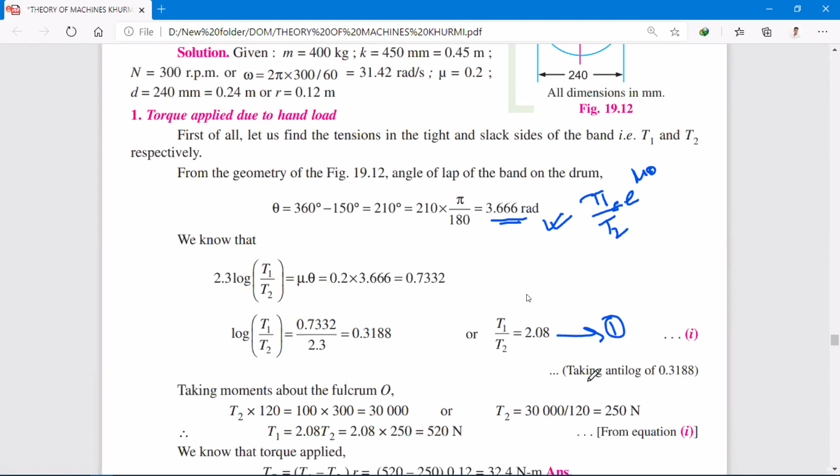But as my braking torque is not given to us, now I will use moment to find the braking torque. Now if you see here, you can see that my drum is moving in clockwise motion. In the figure they mentioned that my drum is moving in clockwise motion. As it is moving clockwise, so my T1 will be in this direction straight away, and my T2 will be in this direction. So my T1 is acting in this direction. This is my P, that is given to me, 100 Newton, and everything they have given to me.

Now what I will do is take the moment about this point O. Now when I'm taking the moment about this O, you can see here, this T2 into this distance, 120, T2 into 120, which will act in downward direction. Now if you take T1 into O, this is also acting in downward direction, but here at this portion, as I'm taking the moment over this point O, this T1 will get cancelled.

This T1 will get cancelled, and this point, okay, this 100 Newton.

Now if you see, I will make your lesson more easy. This T2 into 120 will try to rotate about this O in anti-clockwise motion. You understand that way? This T2 into 120 about this point O will try to rotate in anti-clockwise motion.

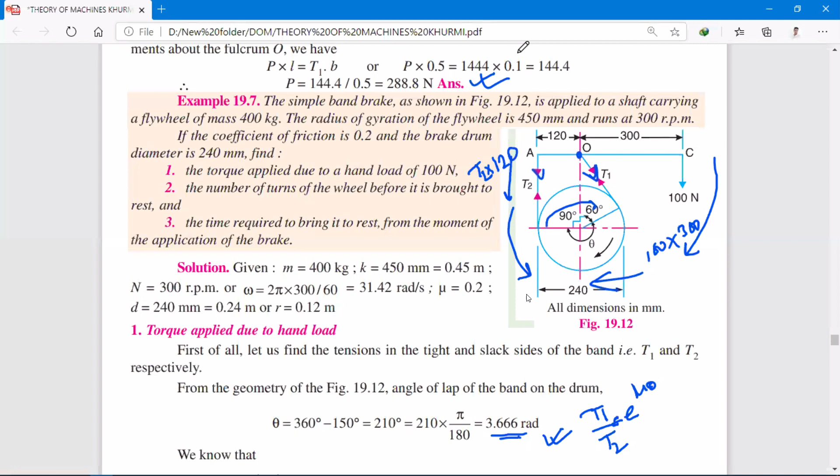So as they both are opposite to each other, this is my 100 into the length 300. So as they both are in opposite direction, straight away I will equate them. So what I will get here, T2 into 120 is equal to 100 into 300.

So the same thing they have wrote here, taking moment about the fulcrum, T2 into 120 is equal to 100 into 300, and then solving, I'm getting here T2 equal to 250 Newton.

Now, if you recall the first equation, T1 by T2 is equal to 2.08. Simply substitute T2 value here, and you will get one new T1 value. So this T1, after solving it, you are getting 520 Newton.

Now, we know the braking torque formula is T1 minus T2 into R. Braking torque formula was T1 minus T2 into R.

Simply substitute this T1 value that we are getting, 520 here, and T2 value 250 we are getting here. R is nothing but the diameter of the drum, the radius of the drum. Simply substitute all the values, and at last what you are getting here is 32.4 Newton meter. So this is my braking torque.

That is my braking torque. So this was my first part of the question.

Now they are asking, the second part is the number of turns of the wheel before it is brought to rest. So we have to find the number of turns. So we will assume that let small n equal to number of turns of the wheel before it is brought to rest.

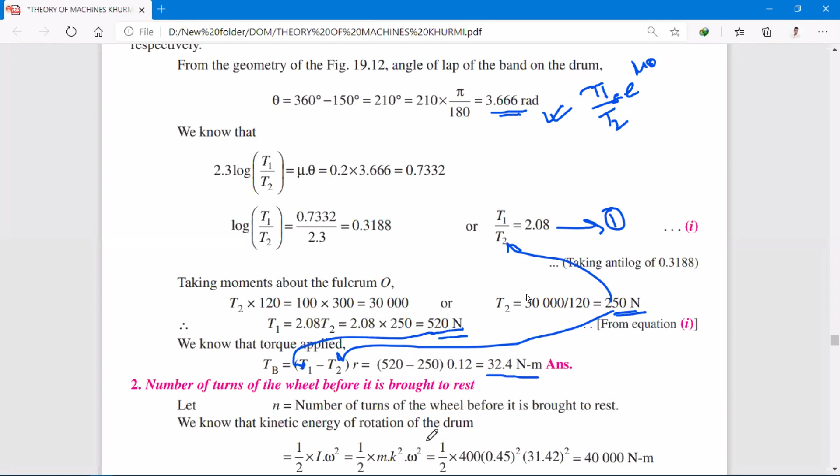Replace all the thing by the given data, and then at last I am getting here 40,000 Newton meter. So this is my kinetic energy of the rotation of the drum.

Now this kinetic energy, we have assumed that let the kinetic energy be used to overcome this work done by the braking torque in n revolution, because n is nothing but my number of turns of the wheel before it is brought to rest.

So straight away we can write, hence we can write from here that braking torque into angular displacement is nothing but equal to kinetic energy of the flywheel.

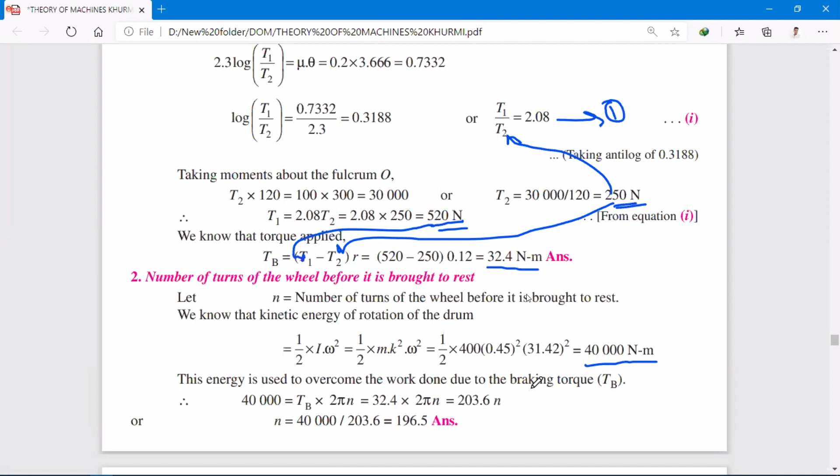So we can write braking torque into angular displacement equals kinetic energy. Now, what's my angular displacement? If you see, total is my 2 pi, drum is my 2 pi, but it will rotate, let's say, n times. So at last, what I'm getting here in angle is 2 pi into n.

And TB we know the value, TB is 32.4 Newton meter. So 32.4 into 2 pi into n is equal to kinetic energy. Kinetic energy we've got 40,000 Newton meter. Substituting all this, I'm getting at last n equal to 196.5.

So number of turns, n equal to 196.5. So always remember, what we are doing is we are using kinetic energy to overcome the work done by the braking torque in n revolutions.

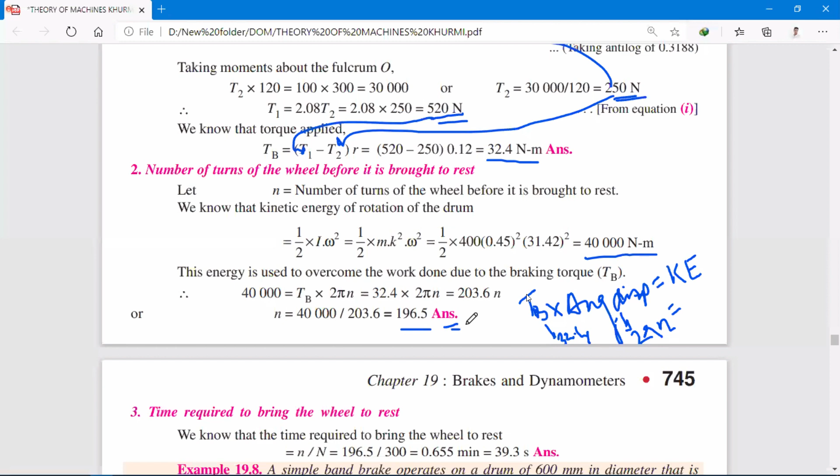Now it is again asking the time required to bring the wheel to rest. If you see here, this small n is nothing but the number of turns, and capital N is my speed. So simply I'm dividing these two.

I'm just dividing n by capital N, and at last we get 39.3 seconds, which is the required answer. So time required to bring the wheel to rest is n divided by capital N.

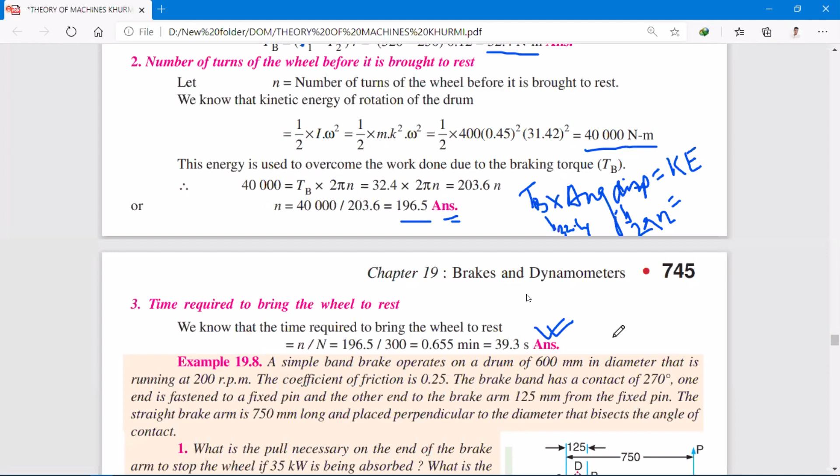So this was one of the important questions for simple band brake. Please try to solve all the numericals from Khurmi or Rattan, whichever you like, please try to solve it.

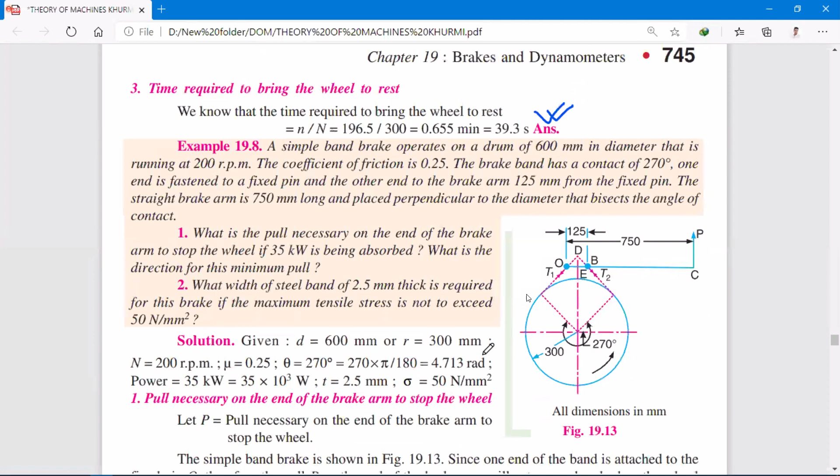Now coming to differential band brake. If you see in the simple band brake, out of the two ends, one end is connected to the fulcrum point of the lever. But here in differential band brake, they will be kept in separate, different positions. They won't be attached to the fulcrum or pivot point. That's why they are known as differential band brake.

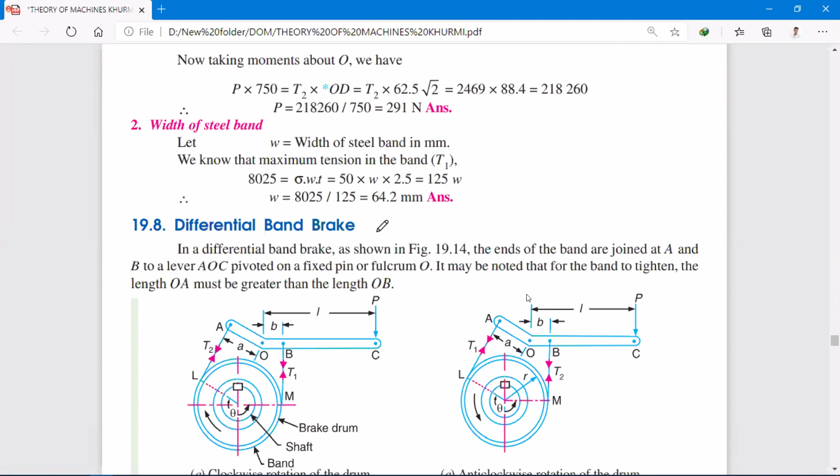So differential band brake looks somewhat like this type, but all the principles work just the same way as the simple band brake works. Just we will have one more thing if you see this diagram here.

Suppose I have to find the moment about this clockwise rotation of the drum, so T1 is that. So how will we get here? P into L, which is trying to rotate in clockwise motion. T1 into B, this is also in clockwise motion. T2 into A.

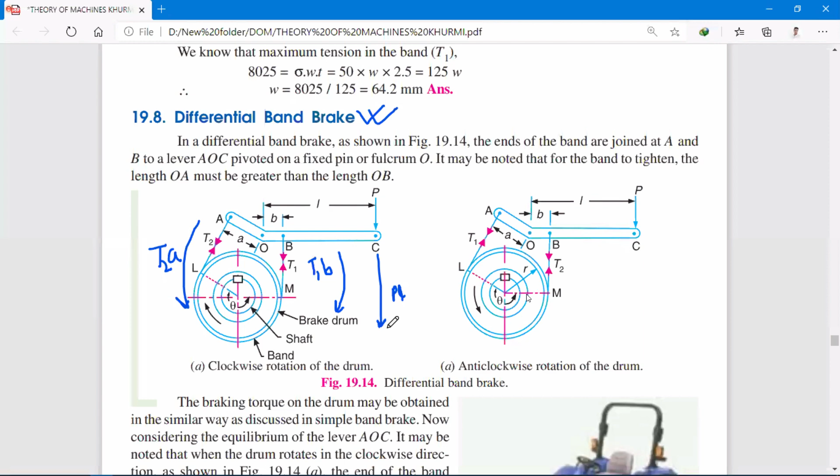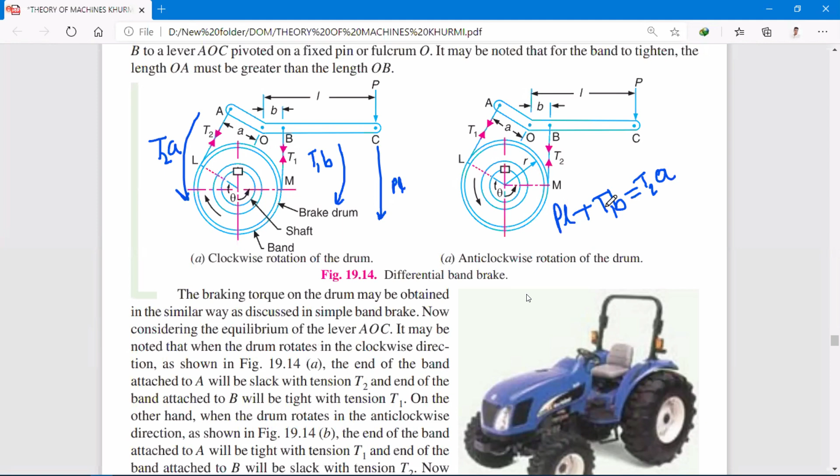This direction is anti-clockwise motion. So at last, what I'm getting here: PL clockwise, T1 into B clockwise is equal to, because it's moving anti-clockwise, T2 into A. So this way we have to find the moments. But in simple band brake, any one part is to get zero, because it is connected to the fulcrum point or pivot point from which we have to take the moment.

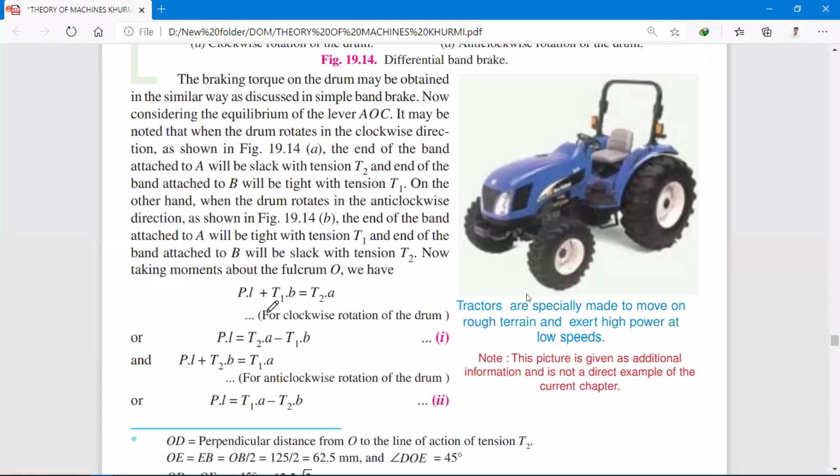But it will not happen here. You can see from here what I'm getting: PL plus T1B is equal to T2A. So that's the same thing I'm getting here: PL plus T1B is equal to T2A.

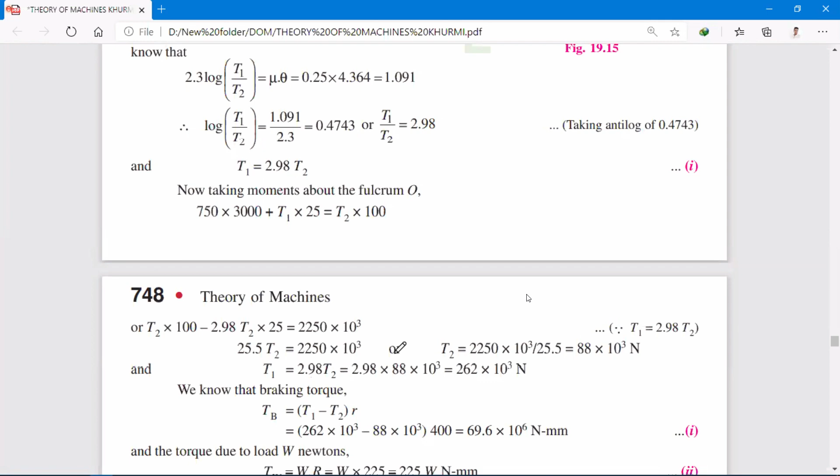Otherwise, it works the same way as we solved the numerical for simple band brake, the same way it will work here also. Just you should know how to find the moment. So this one is very much important, how you're finding it.

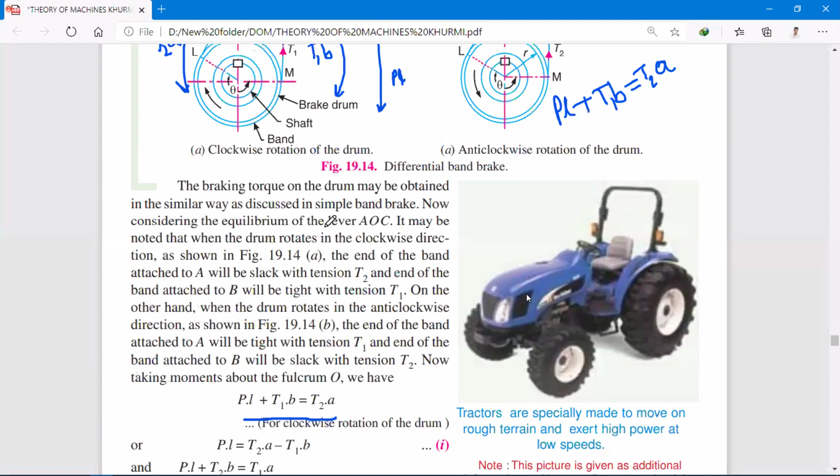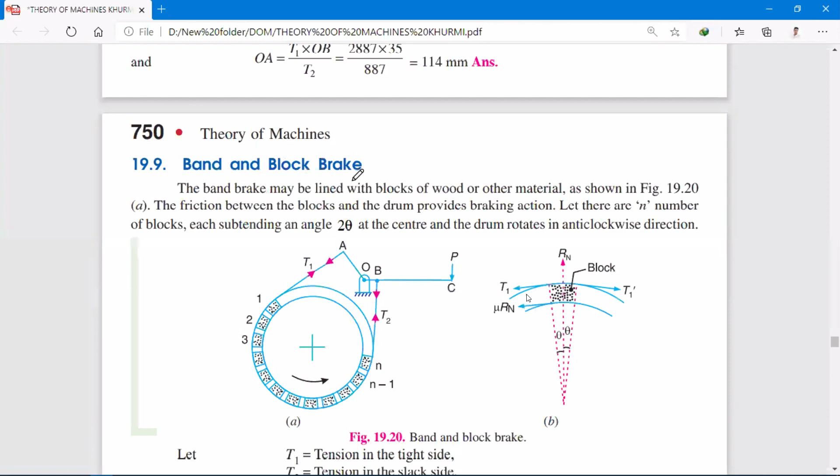Now coming to the last one, which is my band and block brake. It will follow the same process like simple band brake. Only difference is that with the band brake, we are attaching some block brakes in them.

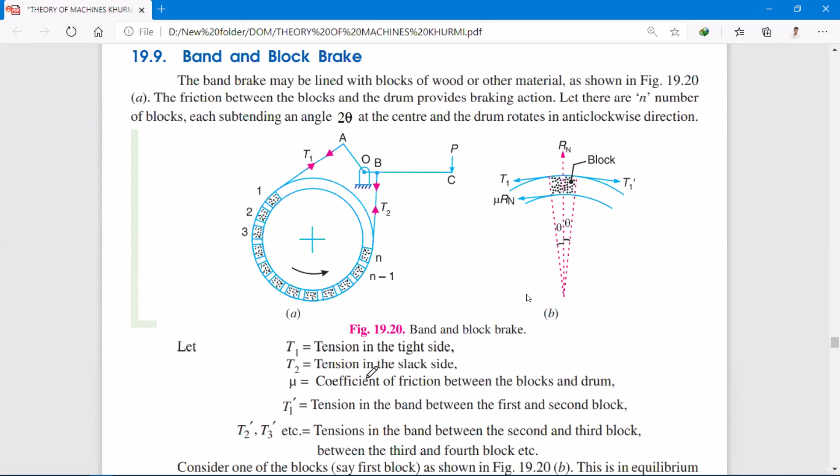T1 is the tension in the tight side, T2 is the tension in the slack side, mu is the coefficient of friction, and n is the number of blocks that we are adding to it.

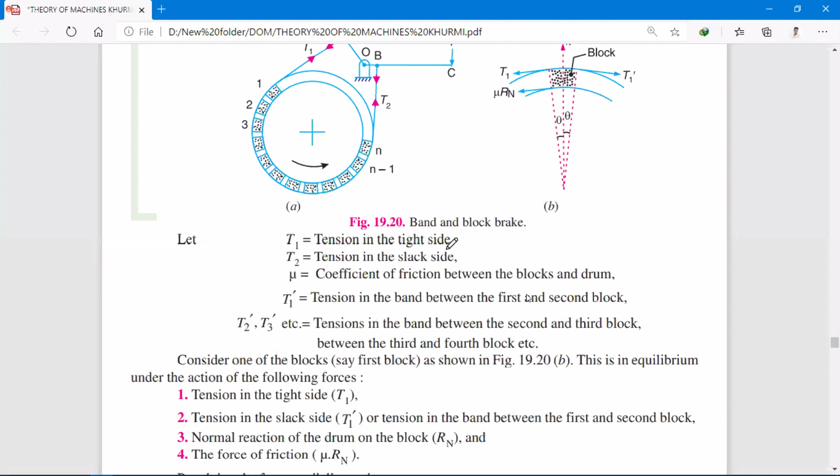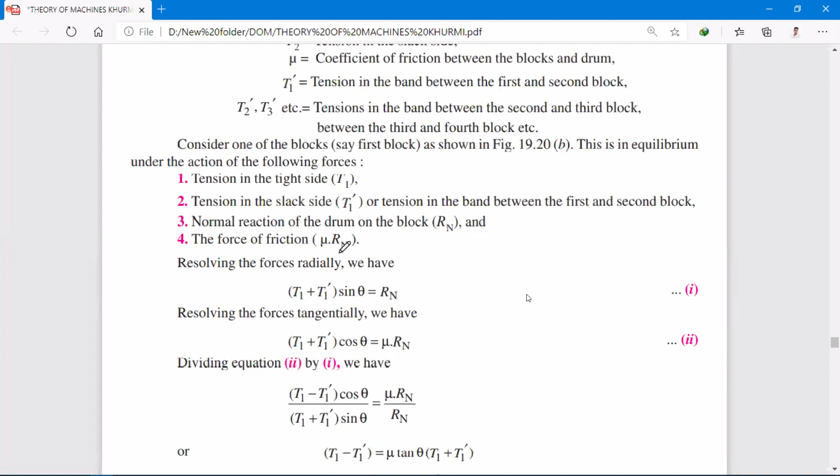Tension in the tight side is T1, and tension in the slack side is mentioned as T1 dash. Now normal reaction on the drum, on resolving. So at last, after solving all this, you will get one equation.

T1 by T2 is equal to 1 plus mu tan theta by 1 minus mu tan theta, to the power n. Or we can write Tn by T naught is also equal to this, so Tn by T naught equals T1 by T2 equals 1 plus mu tan theta by 1 minus mu tan theta to the whole power n. This is one of the important formulas you should remember for the band and block brake.

Again, it will have the same formula for braking torque: TB equals T1 minus T2 into Re, where Re is the effective radius. If the thickness of the belt is given, Re equals R plus T by 2. If the thickness of the belt is not given, then the simple formula T1 minus T2 into R is used.

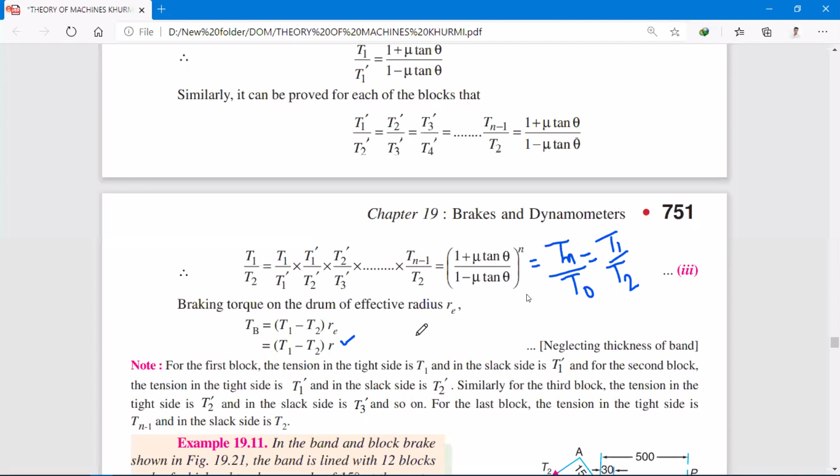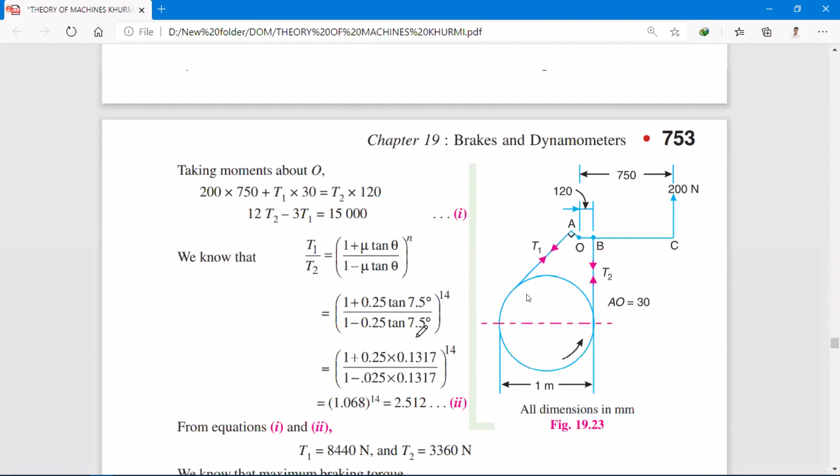So if we try to solve a numerical on that, let's see if time permits, we will solve a numerical. It's quite lengthy, so let's solve it.

As mentioned in a simple band brake, for the band and block brake, as shown in the figure, the band is lined with 12 blocks, so n equals 12. Each of which subtends an angle of 15 degrees at the center of the rotating drum.

This angle will be nothing but 2 theta, so 2 theta equals 15 degrees, meaning theta equals 7.5 degrees. The thickness of the block is 75 mm, so T equals 75 mm, and these T values are given to us.

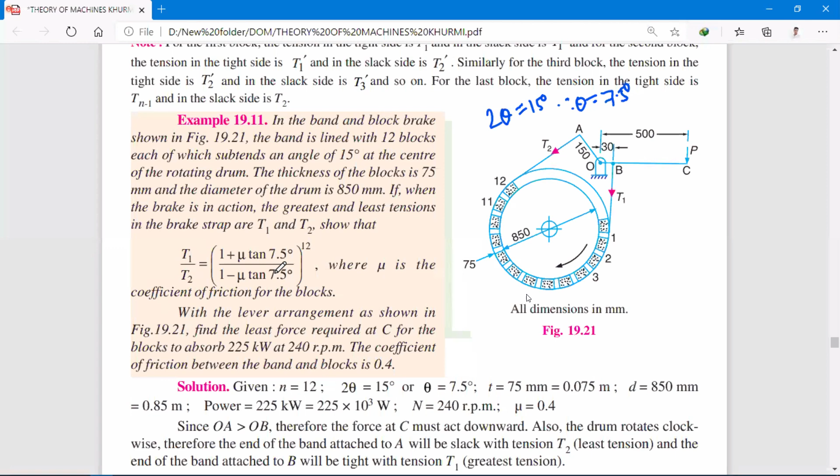The diameter of the drum is 850 mm, so D value is given to us. When the brake is in action, the greatest and least tensions in the brake straps are T1 and T2. Show that T1 by T2 equals 1 plus mu... let us prove this, it's a proving question.

Leave that, we will. This is the proof. Okay, we'll solve this numerical.

A band and block brake having 14 blocks, each of which subtends an angle of 15 degrees at the center, is applied to a drum of 1 meter effective diameter. So the D value is given to me.

The drum and flywheel mounted on the same shaft has a mass of 2000 kg. So flywheel mass they have given to me, 2000 kg, and a combined radius of gyration of 500 mm. That means again we have to find the moment of inertia, because m and k value is given to us.

The two ends of the band are attached to pins on opposite sides of the brake lever at a distance of 30 mm and 120 mm from the fulcrum. So one end is attached at 30 mm, another end is attached at 120 mm.

If a force of 200 Newton is applied at a distance of 750 mm from the fulcrum, one force is applying. Find maximum braking torque. We know the formula: braking torque equals T1 minus T2 into R.

Angular retardation of the drum, and the time taken by the system to come to rest from the rated speed of 360 rpm. The same question, how we solve for the simple band brake, the same way it is here.

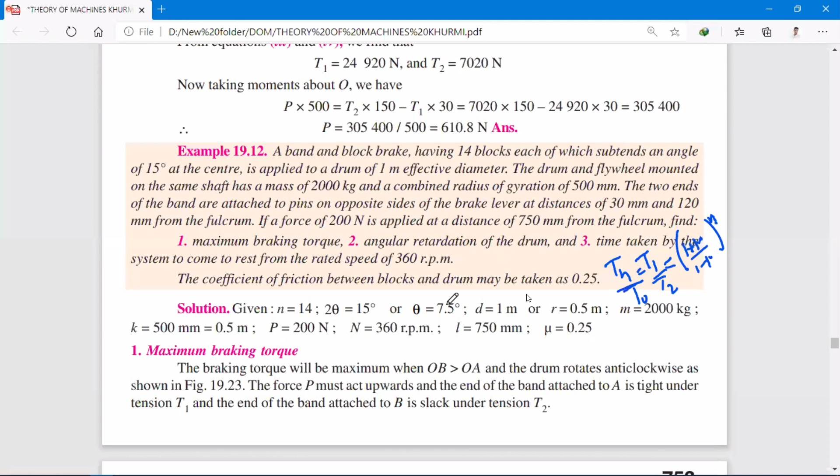So first of all, what we will do? First of all, we'll try to draw the diagram. Okay, so this is my diagram. In the given question, they have mentioned that this is my diagram, and I have assumed that my drum is moving in anti-clockwise motion.

They have not given any indication of rotation. Now, one more thing: if in the examination question paper they have not mentioned the rotation of the drum, whether it's moving clockwise or anti-clockwise, you can solve the numerical in any one of the cases. But if they have specifically mentioned that you have to solve for both cases, clockwise and anti-clockwise, then you have to solve both equations. If they have not mentioned it, you can take any direction, either clockwise or anti-clockwise rotation of the drum. It's fully up to your wish.

Now, if you see in the given question, they have not mentioned the rotation of the drum, whether it is moving clockwise or anti-clockwise. So I will go by the figure. I have assumed that my drum is moving in anti-clockwise motion.

Now if I try to take a moment: this P value, this my 200 Newton, is acting in the upward direction. So it will try to rotate in anti-clockwise motion. Now this...

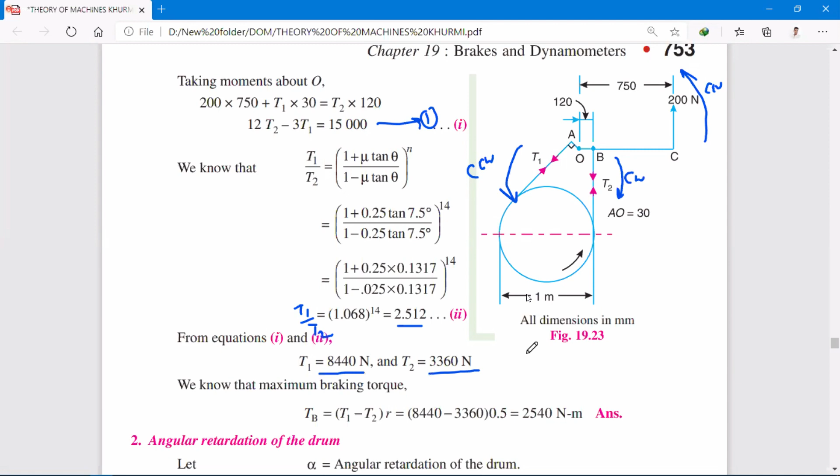Two equations, two unknowns. So on solving these two equations, I will get the value of T1 and T2. I'm getting T1 equal to this much, T2 equal to this much. So after getting T1 and T2, as we know the braking torque formula, simply subtract these two and multiply with R. And at last I'm getting here 2540 Newton meter. So this is my braking torque.

Again, I told you, when thickness of the belt is not given, we will take R. When the thickness of the belt is given, we will replace it by Re, where Re is equal to R plus T by 2, where T is the thickness of the belt.

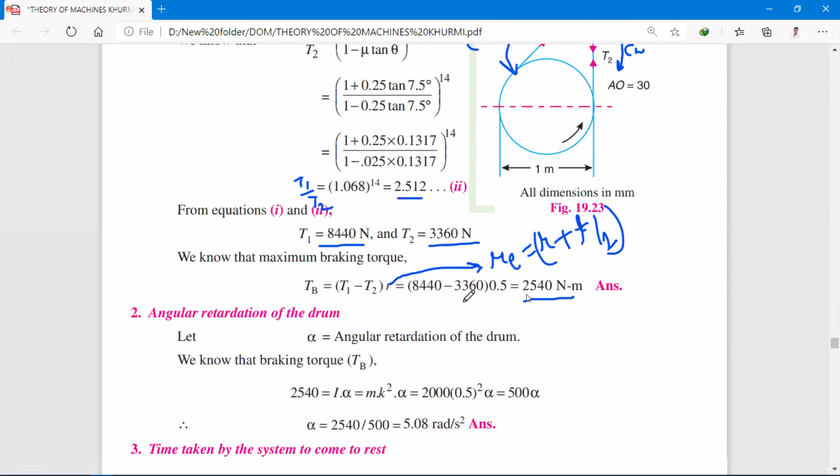Now it is saying to find the angular retardation of the drum, that is my alpha value. So we know that torque is equal to I into alpha, the basic formula. Torque value we know, alpha we have to find out. I is equal to Mk square. Substitute all the values and you will get the alpha value equal to 5.08 radian per second squared. So after getting this, I got my alpha value.

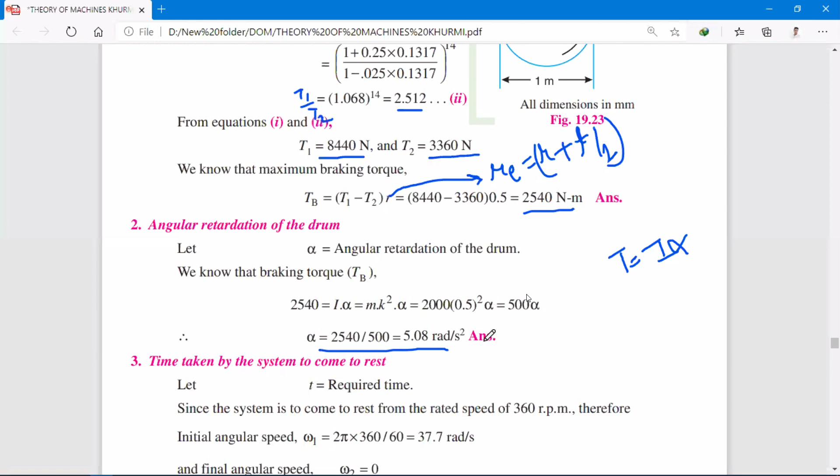Now it is saying, find the time taken by the system to come to rest. So that means simply we know the formula V equal to U plus AT. This is a basic formula we all know from childhood. V is equal to U plus AT. That means it is saying time required for it to come to rest, so we replace it with omega. So this will become omega 1 is equal to omega naught plus alpha t.

Coming to rest means I will just substitute this one equal to 0. This is my final velocity and this is my initial. So I have to first find my initial value. What's my omega naught? Omega naught is nothing but the formula 2 pi n by 60. Now, since the system is coming to rest from starting, substitute the n value and you will get the value here, 37.7.

So this is my initial value. Substitute it in here. This is my 0 because it is coming to rest. Alpha we know from here, 5.08. So straight away you can get the t value. So on solving all this, we are getting the time equal to 7.42 seconds.